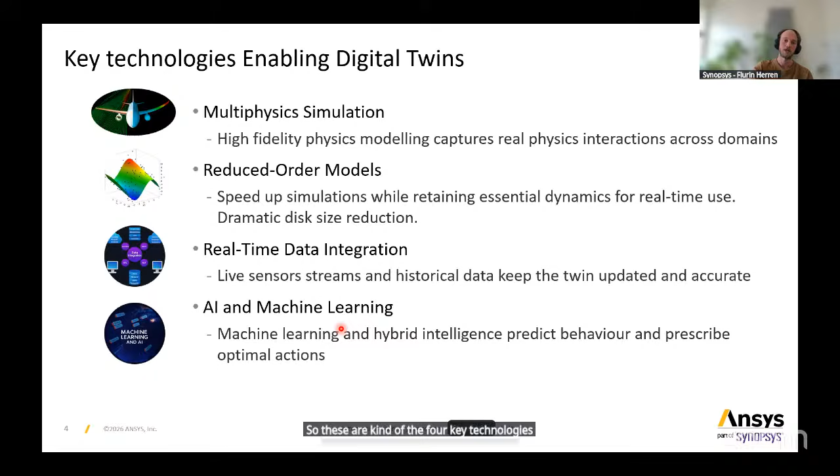So how does the ANSYS environment fit into this? I really like this view because it shows what ANSYS is all about. The foundation at the bottom is physics-based simulation, and we have all of these. Just above, we have the digital twins, which feed into all of these physics. So the multi-physics approach is covered to a great extent.

We can create reduced order models with our process and data management and optimization tools, such as OptiSlang, for example. We can use our AI tools to create prediction models. So we have basically all of the key technologies covered within the whole ANSYS suite.

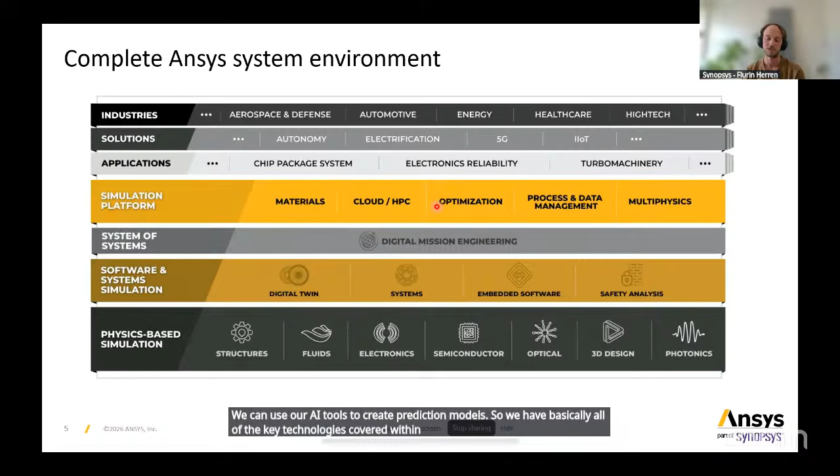And we can obviously create this as an exporter platform in an agnostic container as well. So this is kind of the full opportunity and the full possibility and capabilities that we have within the ANSYS suite. But I wanted to now build it up in two levels.

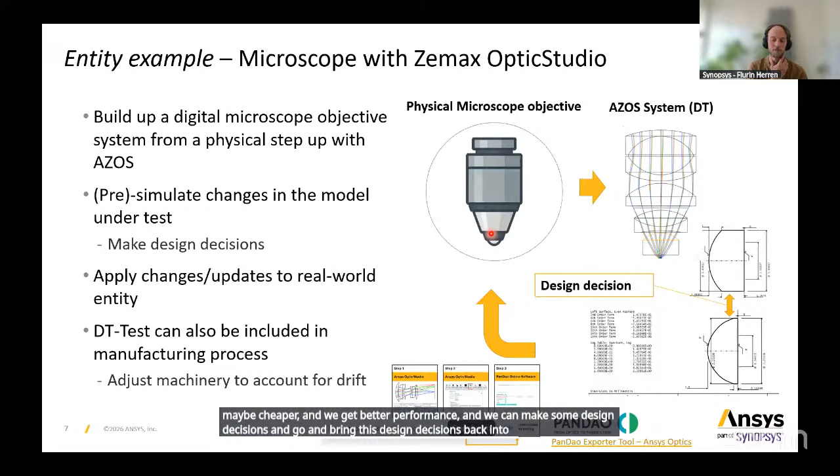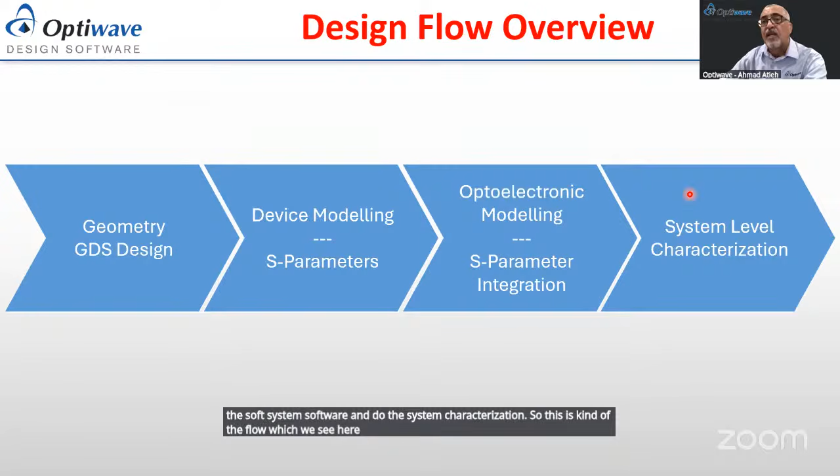These are the general components and GDS2 masks for the ring resonators, for example, or the modulators, as well as the multiplexer and demultiplexer side. This GDS mask has been used in the software, and then you can extract S-parameter matrices or netlists, and use them in system characterization.

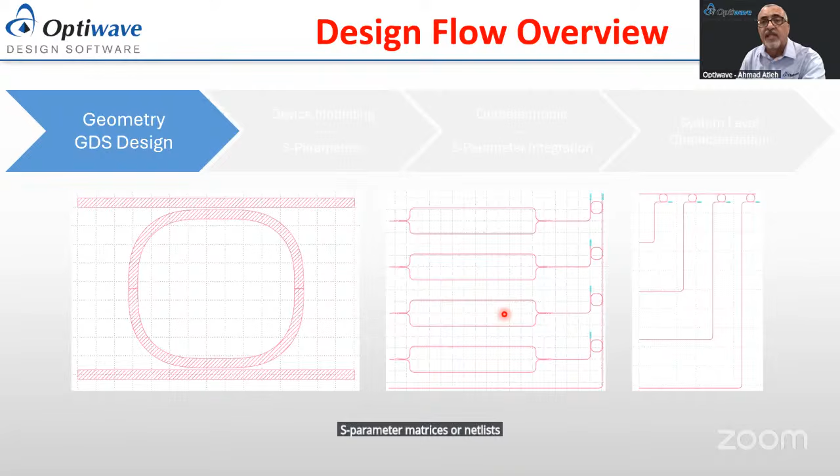So the first part here, beside the GDS mask, is the device level. At the device level, you can use different software packages in Optiwave, such as OptiOmega, which is dedicated for photonic integrated circuit designs, and then you can use FDTD to do the simulation.

You can also use the beam propagation method in OptiOmega. As you can see here, you design MMIs, ring resonators, waveguides, bends, and phase shifters. Anything you need to design, you can simulate within the software.

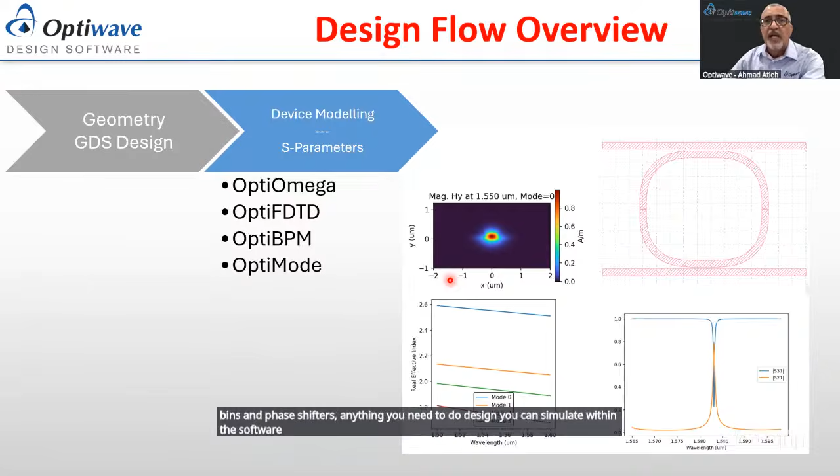This is the structure of the OptiSpice-like representation of the modulators, for example, how we use the design in OptiSpice. And then eventually, as you can see here, there's the modulator—two modulators right now—and then two rings.

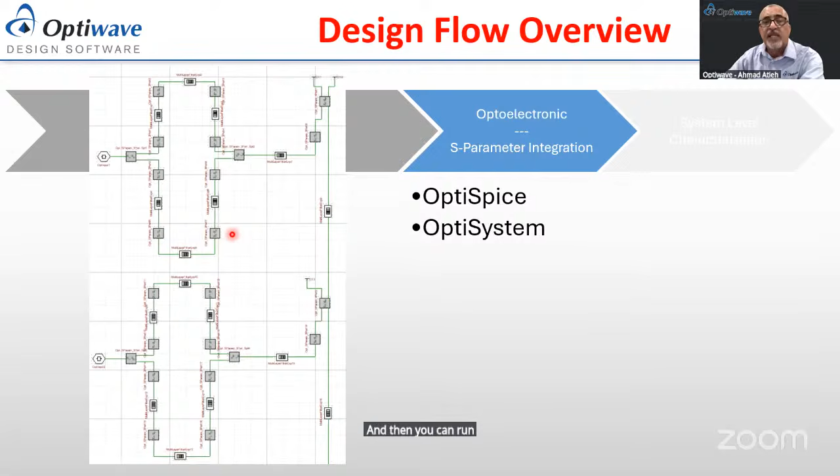Then you can run the simulation and create a netlist, and pass it to OptiSystem software, where you can go into the next phase, which is the system characterization.

Now, in the system characterization, OptiSystem software, you can integrate any type of modulation in the market externally to your PIC which you design. And then you can do system characterization, where you can look into, for example, BER analysis, constellation diagrams, and spectrum analysis.

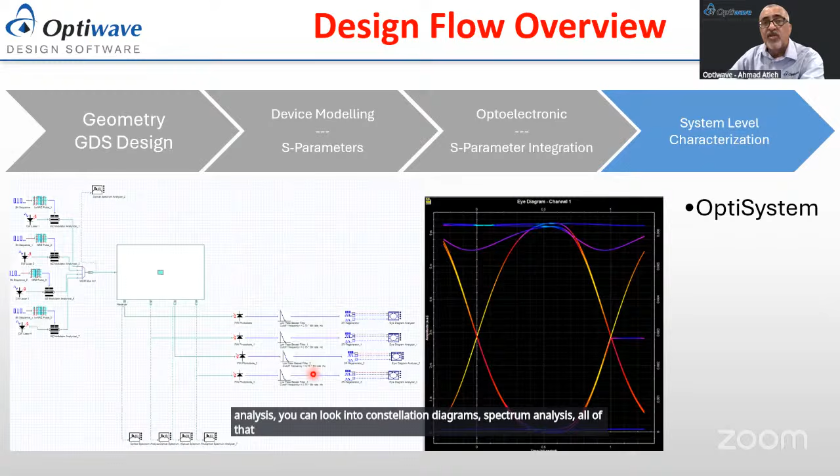In fact, OptiSystem software has over 630 components in the optical domain, electrical domain, binary, and M-ary, which you can use for designing your system, as well as to characterize or view the performance, represented in what we call visualizers, which are actually equipment in the field.

We also have an OptiSystem example library, which is a huge library mainly used for guiding users on how to use the components as well as build on it for the representation of the system. So what you can do is use these systems and plug in your PIC instead of the components used, for example, and do your analysis on it.

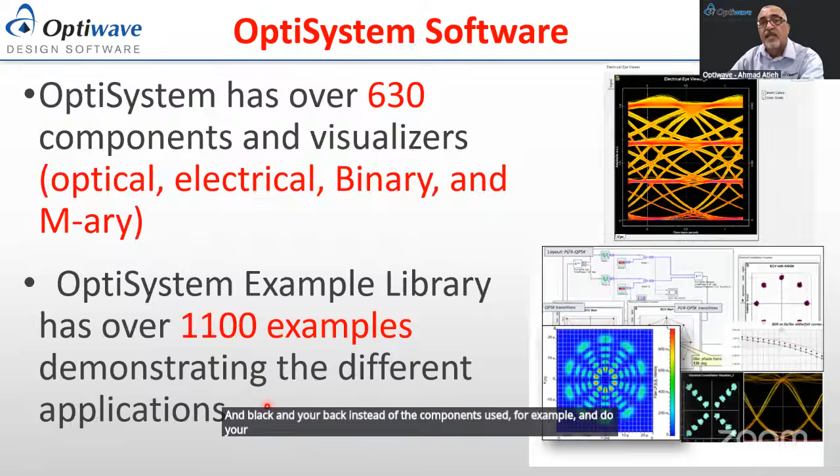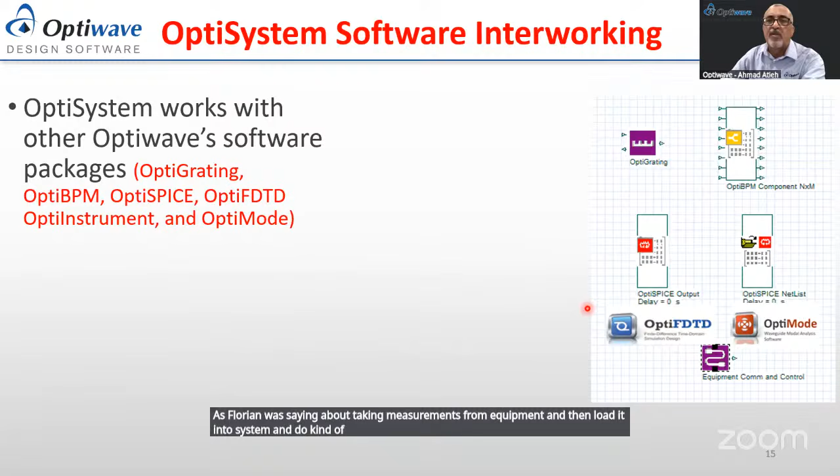Okay, and then the other part of it is external software integration, which can be done through the MATLAB component, C++, Python, as well as Scilab.

The other external software we're working with is Luceda, which is the IPKISS software. So you can design your photonic integrated circuit in their IPKISS software, and then do the simulation in their Caphe, get netlists, and then load it into this component, and we can use it for system characterization.

In fact, we have two videos on our YouTube channel which you can view on how to use ring resonators as well as cross-connect switches based on designs in IPKISS software.

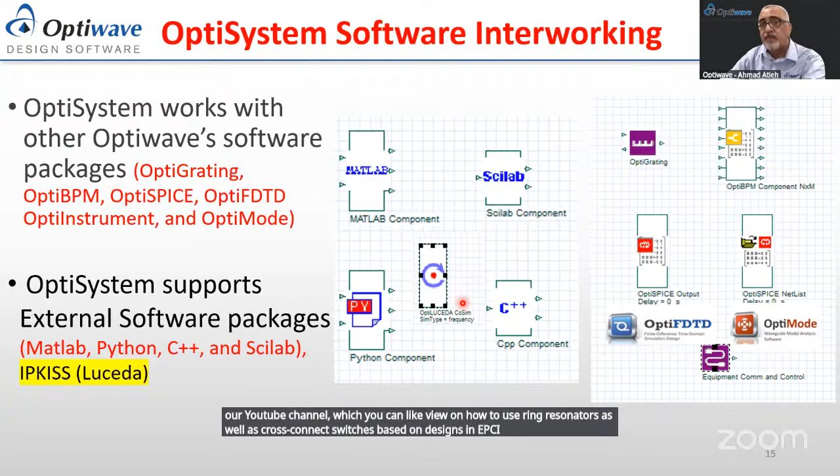This is now talking about the transmitter structure.

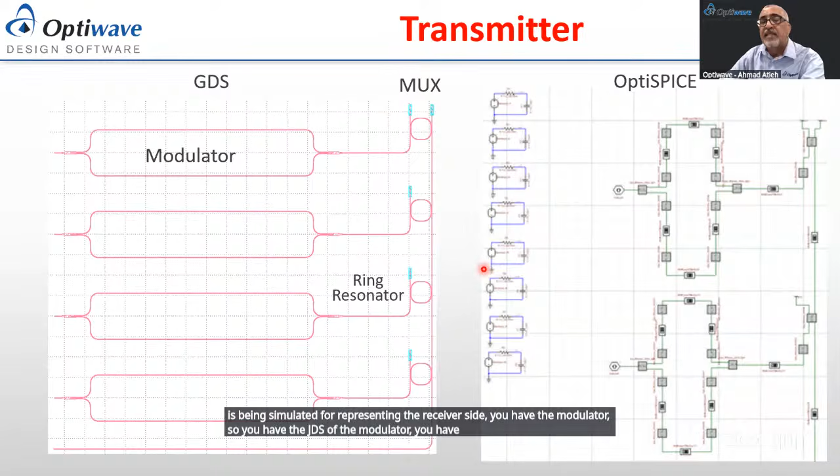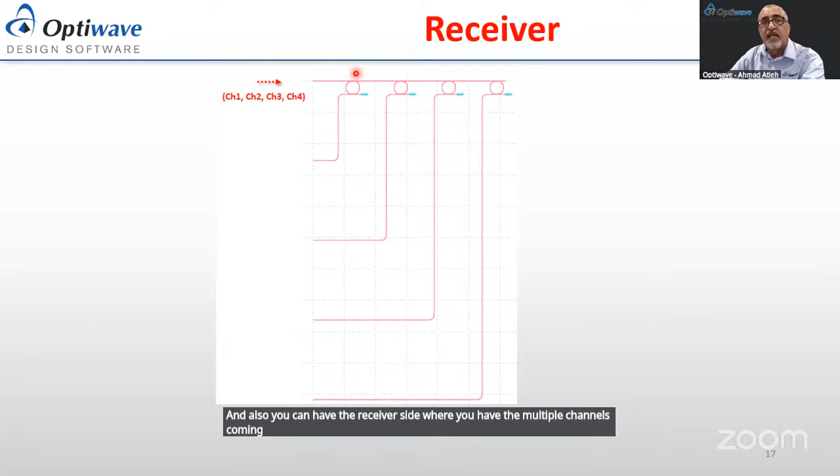For example, what is being simulated for representing the transmitter side, you have the modulator, the GDS of the modulator, and the MUX, and they can be represented in OptiSpice, as you can see here. Also you can have the receiver side where you have the multiple channels coming into the ring resonator, and you can demultiplex them to the desired channels.

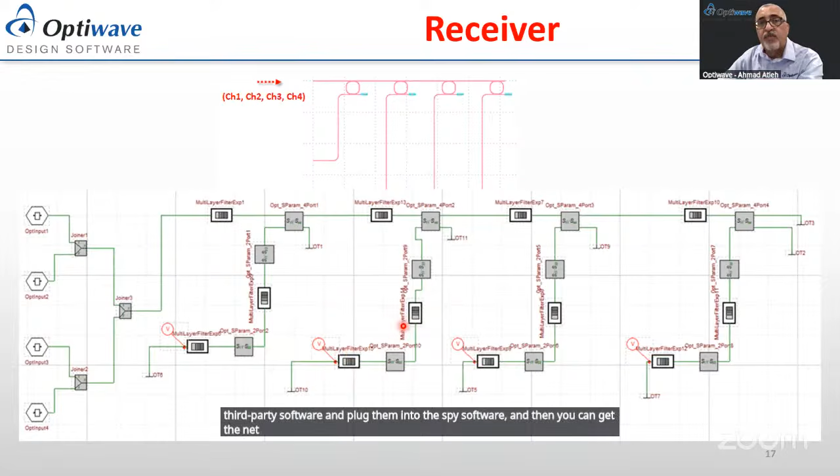As I mentioned, you can do the simulation on OptiSpice based on the S parameters you extract from OptiMode or from other third-party software and plug them into the SPICE software. Then you can get the netlist and use them in OptiSystem software. As you can see here, you can have these components from SPICE in the netlists, and eventually you can build.

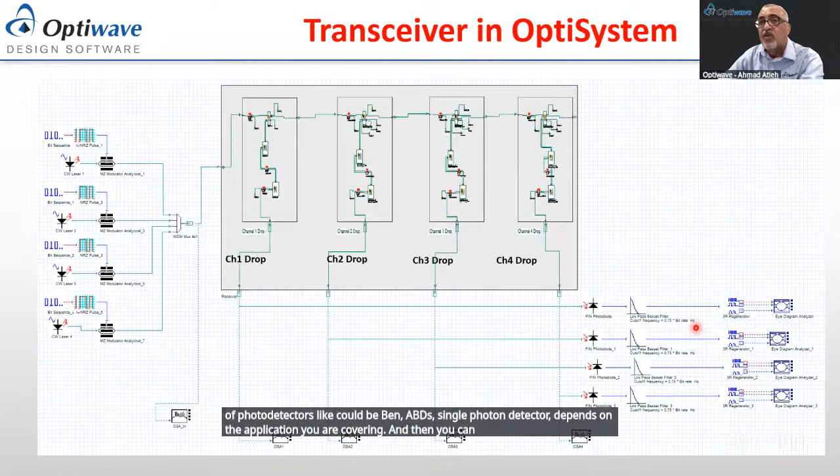Then you can do the monitoring using different instrumentation in OptiSystem software. So some of this analysis, like for example, you look at the spectrum analyzer and start to analyze the system in terms of isolation for the ring resonators, how is the isolation between channels and how is the insertion losses and so on. Also you can look at the eye diagrams and analyze the BER.

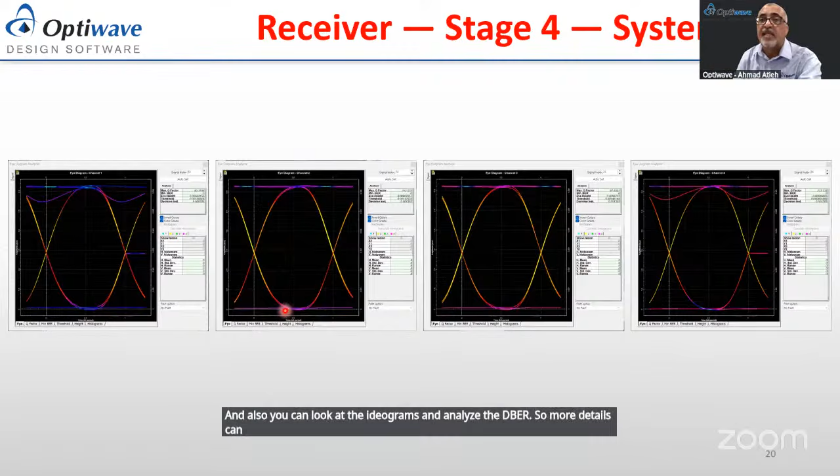More details can be seen if you are interested. Basically what we need to message here, hopefully from this presentation, is to get PIC designers to augment their system characterization to this flow. Also as part of our development here at Optiwave, we are adding into our software PDKs, which come with actual measured data for the devices and integrate them with the software to allow smoother presentation, like integration between the devices and the system characterization.

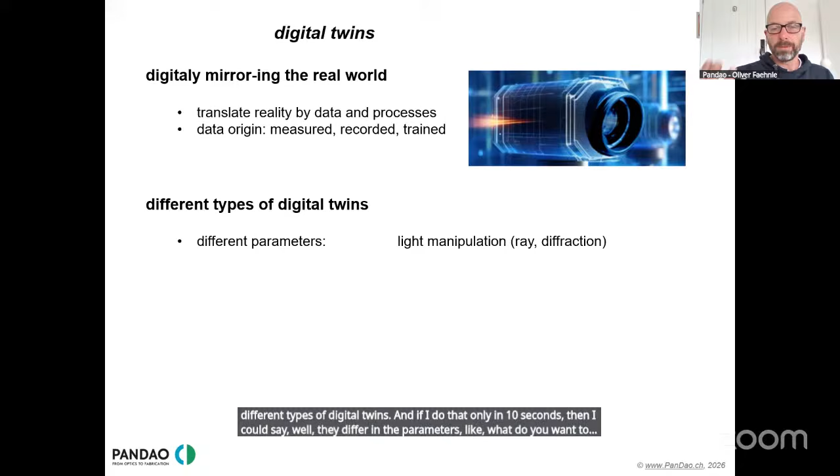If I do that in just 10 seconds: they differ in parameters—what do you want to use this twin for? Light manipulation, ray tracing, or diffraction optics effects, if we stick to optical design. There are many different parameters, and depending on the parameter, you need a different approach for your digital twin.

They also differ in application: is it for optics performance, for manufacturing quality—what we do—or for factory workflow without any physics, where you might use SAP? That defines your digital twin. They also differ in process analysis.

Are we really doing finite element analysis, checking material response to something, or computational fluid dynamics? Or are we just generating a data cloud and teaching that through AI?

Then the last one: the way we take data in. Are we training our AI with a data cloud? Do we use rules, do we use know-how? Do we even use communication information from a different digital twin, helping me, as a digital twin, become a little more complex?

So these are the different ways, and PanDao is monitoring the manufacturing quality, reading in optical designs of systems, and we do that at quite a complex level—the workflow level of fabrication chains.

We had to sharpen this very accurately to be able to generate and run that in industry. Inter-digital twins communication is a really hot topic because there is quality maintained or lost. In theory, it should even level up to a higher level, like a multi-agent system running in several AIs in one thing. So let me focus on optical design and producibility.

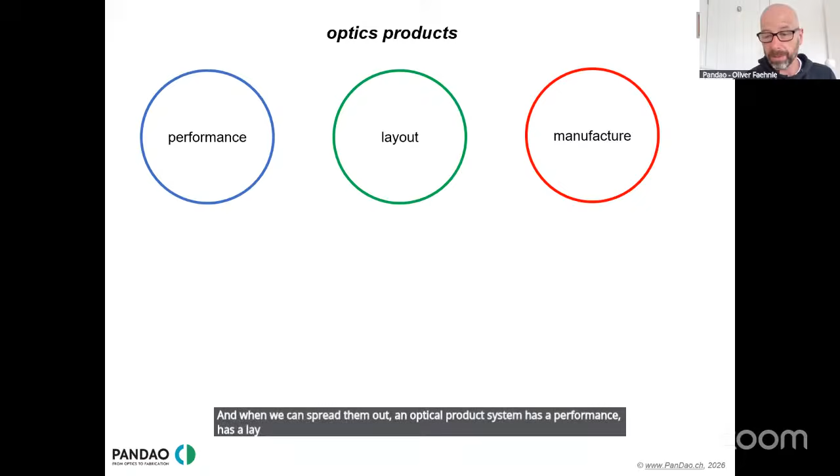If we have an optical product, those beautiful 3 circles you see here, we can spread them out. An optical product system has a performance, has a layout, and has to be manufactured. These are 3 different languages which we speak, like throughput, market price, and so on, and types of optics.

And types of technologies. If we have a look, we all know that there are beautiful digital twins existing, connecting the layout and the performance. The optical design softwares balance performance and system layout, whether that is a meta surface, a diffractive, or a refractive optical system—they all perform and have to do something like MTF.

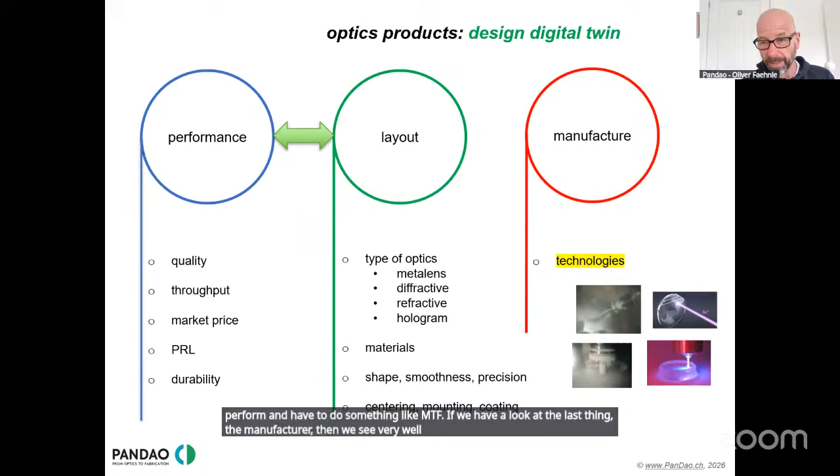If we have a look at the last thing, the manufacture, we see very well dedicated stuff like plasma, fluid jet, ion beam, and whatever. And it's a big mess. There are 360 different technologies, different physical effects, different solutions, different levels of TRL, of ripeness, industrial ripeness, and so on. So what can we do with that?

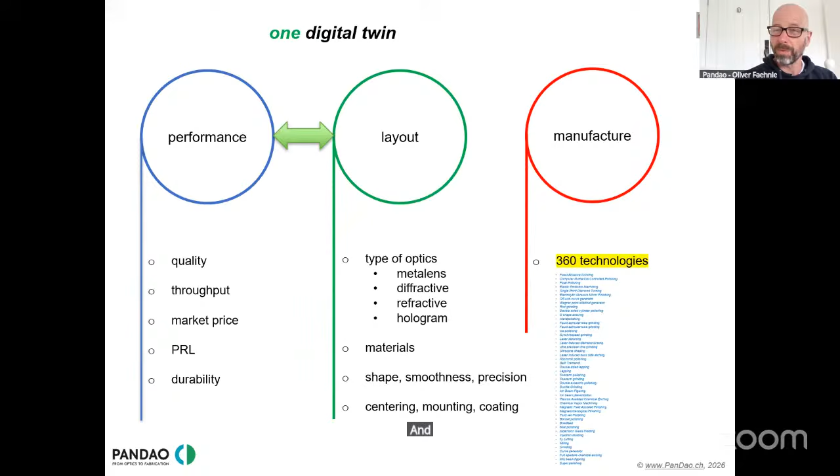If we went there inside and had a look—well, nobody needs a single digital twin for one technology. That's nice if you can model your polishing process for a professor in a university, but in industry we need the whole thing. So we went a level up and managed to model the whole fabrication chain. And well, how does that work?

If we are really doing that, you can level up, as Flurin showed in one of his slides—I will show at the end also a short slide to that. Once you have the layout optimized for performance, that does not mean that it's also optimized for manufacture. If you have here a digital twin connection, you can have a whole balancing from performance to manufacture through layout. That's what people are aiming on when they are using us—the digital twin that reaches from here to there.

So basically, like Star Wars, everybody wants to have the best design. For the best design, you need a producibility analysis, and then you need to optimize a fabrication chain. So if you manage to have your optical system described in, for example, ISO or MIL, then you feed it into a PanDao system.

There are 360 technologies digitalized, and they are digitalized in a way that they can communicate with each other on their level, and they are fighting with each other to be allowed in the best fabrication chain. The best chain swims out of the swarm of fish and is not getting eaten by this barracuda. And that's what we show at the output: the best fabrication chain.

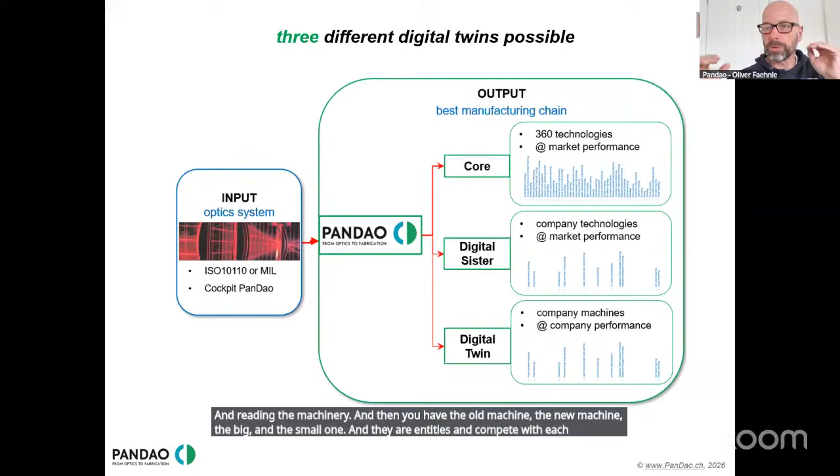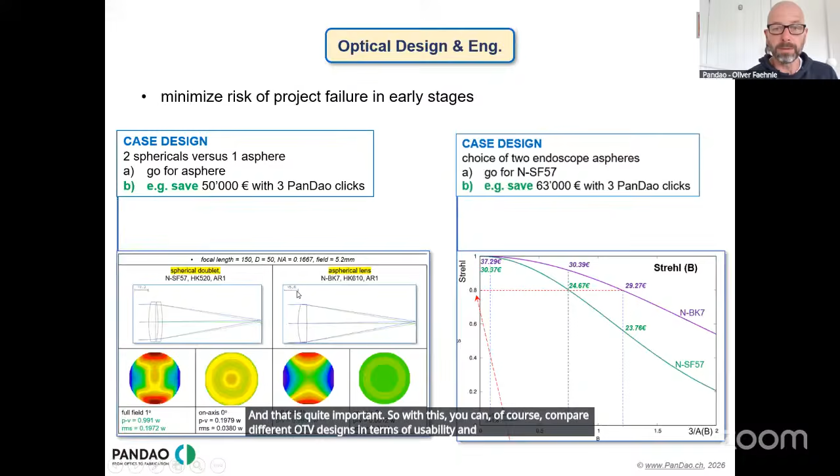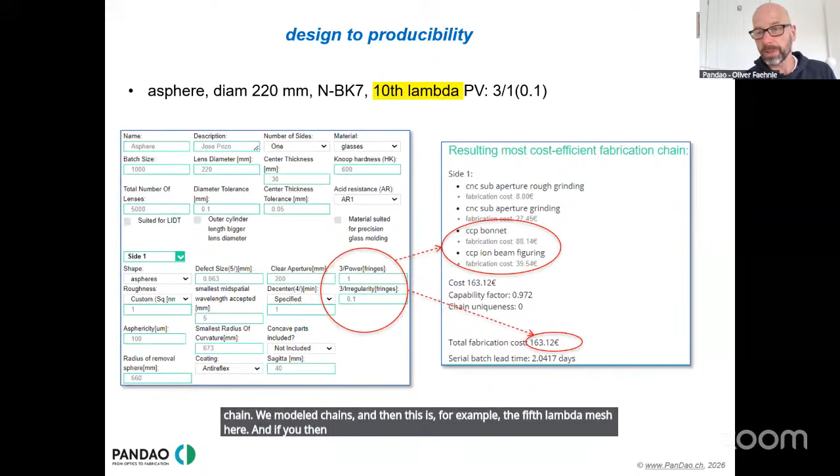So with this, you can compare different optical designs in terms of producibility and cost. You can read in optical elements, and then you see a technology chain. We modeled chains, and this is, for example, the 5th lambda asphere. If you then go to 10th lambda or whatever, you can change everything with one click, and the technology chain answer is different, from MRF to IBF, with some different costs.

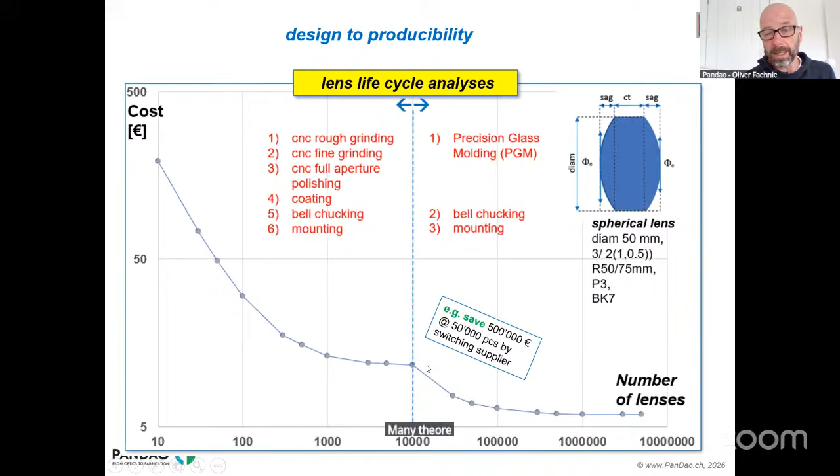With this, you can do a lifecycle analysis, like you want to know during prototyping what's the best chain and cost and risk for the serial fabrication, and where the technology switch is happening. If you know that, you can plan, and as optic designer Flurin, you can compare a glass system with a Zeonex plastic optics system. Then you see, on a logarithmic scale of cost and numbers, where they're quite close to each other, and you might want to jump for better quality and pay a little bit more for that.

So digital twins communicate not only between those technologies on a manufacturing level, but of course also with the digital twins from the optical design. Flurin had this beautiful slide in the beginning, and I want to go back to it, because you simulate and digitalize the performance and layout of your microscope objectives, and then you end up with two different qualities, and they impact with...

Sorry, Oliver, the sound is not good. That's why I'm stopping. Okay, can you hear me? Yeah, now it's better. Okay, maybe my finger was sliding a little bit. Okay, so...

You have two solutions which you consider, and they differ in performance but also differ in risk in manufacturing. So you can give these two variations to PanDao, for example, and then analyze it, and feed that back, communicate that back. This information can be used in the future for an even higher level optic design, where you have five versions possible during your Monte Carlo simulation, and then you weigh them with the manufacturing risk for the same performance, and you go in one direction that is optimized for the performance needed optically and the manufacturing risk we're prepared to take.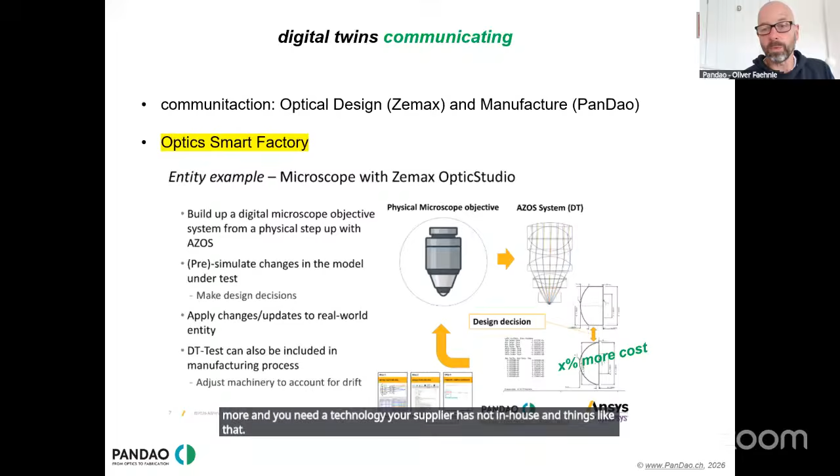We are located in Switzerland, in St. Gallen, and our company name is PanDao. If you're interested, we can show you some of your optics and what we can do with that. We do digital twins of optical workshops of companies, and then with one click you have your whole optical workshop performance, and get the best fabrication chain through your machinery, and can benchmark that with what's available out in the market. These are some customers who are using us.

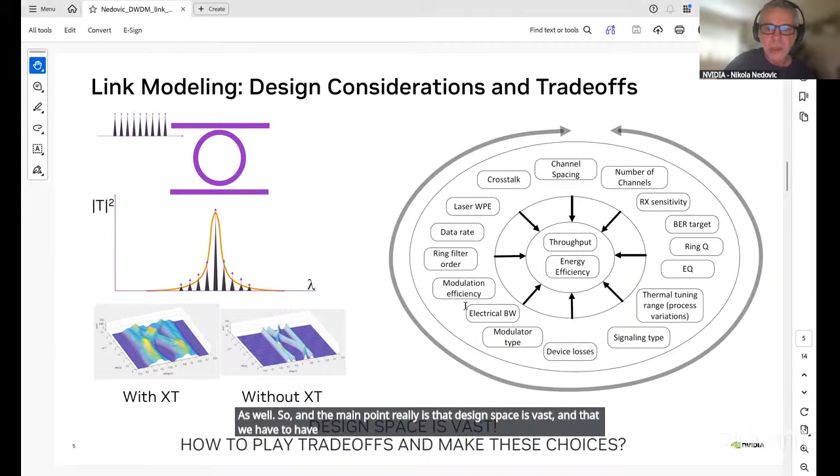So the main point really is that the design space is vast, and we have to have a tool to make these trade-offs and make these choices.

This is a high-level picture of how our internal statistical link tool works. By no means is it the only way to do it, but this is how we handle it.

We first capture the behavior of individual components - I'm going to talk a bit more about rings later - but in general, we capture those components' behavior in the time domain, whether they be optical or electrical components, whether measured, simulated, high level or low level, it doesn't matter. As long as we have a description of its behavior in the time domain, we can then proceed to building a link-level step response matrix.

Basically this will give us a response at any output of the system to any input of the system. It's a big kind of MIMO system that captures all intended behavior, all intended input-to-output transfer functions, as well as all the possible crosstalks and side-channel interactions in the system.

When we have that, we combine it with the data pattern probability and the noise to create statistical eye diagrams. From these statistical eye diagrams, we can get things like eye openings, and in combination with the power model, energy efficiency, and any sensitivities of these metrics to the input parameters we can wiggle, we can optimize.

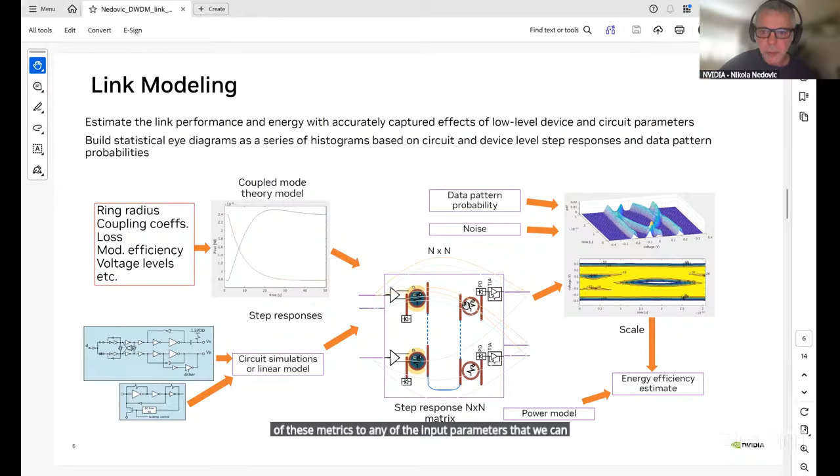Here I show some details on how we estimate the device-level models, for example for micro rings. Essentially what we do is our own encapsulated inline simulation of the ring - basically what SPICE would do, but stripped of anything unessential, to minimize computation time and allow a quick but accurate description of the behavior at a time-domain level.

We do the computation in the complex domain to keep track of the light phase information, which is a peculiarity of light here, or actually anything oscillating. We specifically separate low-to-high and high-to-low responses to capture nonlinearity, because these devices are known to be nonlinear at this level.

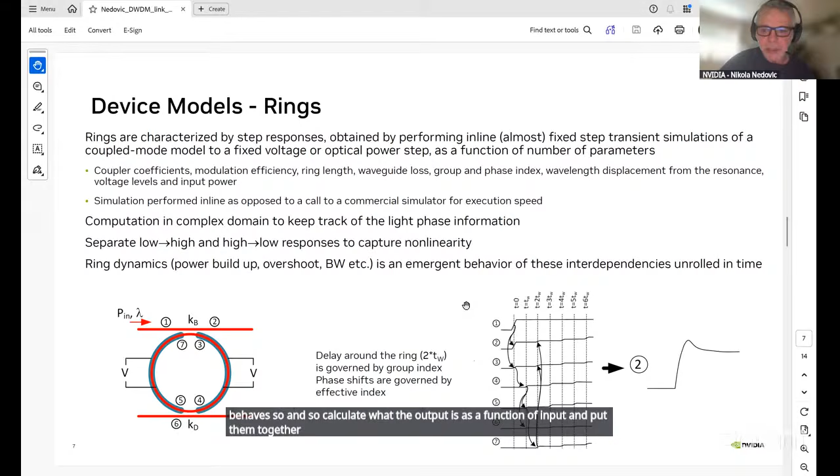I want to point out that really anything complex, things like power buildup, overshoots, optical bandwidth, and so on, is an emergent behavior. We don't specifically model any of that. We just say every component in this device behaves so and so, calculate what the output is as a function of input, and put them together.

And as a result, we get these overshoots and bandwidths and so on. So next, we use these responses to build a statistical eye diagram, and we do this by convolving impulse responses of all these components that we calculated from every input to every output. We do that by having some way of representing how our system looks like.

So what comes first, what comes second, because this is sort of a one-dimensional system, and we use that fact. So we have some sort of computationally non-intensive way of building these step responses. For example, from the second input to the third output, we traverse basically this one-dimensional graph.

And we do the convolution of all these components, including electrical device first, then optical device, a ring in this case, going from electrical input to optical output, and then hop one by one, accounting for all the non-idealities and losses, again from optical input to optical output and so on, until we get to the output of the system that we're interested in.

And we add the effect of random noise by convolving the noiseless histogram, which we build by doing this, with the noise PDF with the appropriate transfer function, which is also what we calculate on the side. This depends on the point of the noise occurrence.

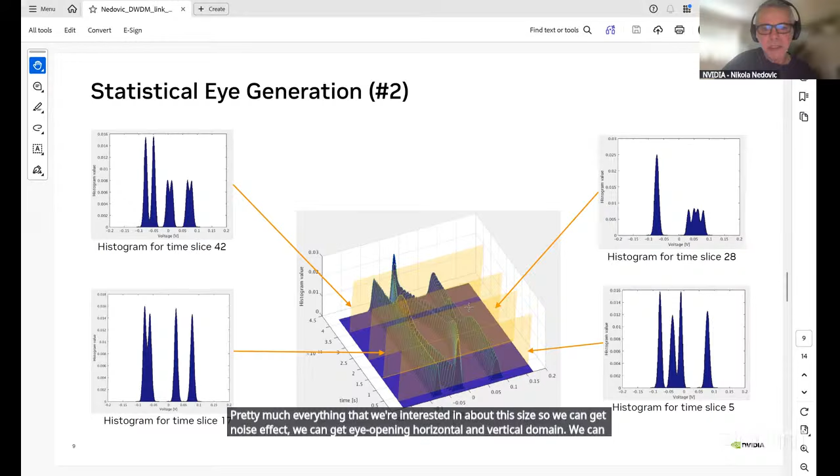So we can get noise effect, we can get eye opening, horizontal and vertical. We can get energy efficiency, and we can get the sensitivity of all these metrics to all our inputs. So the next few slides show some examples of what we can get with this tool.

I'm not going to spend too much time, but this is just an illustration. For example, if we have a link that is already architected, meaning we know how many input channels, what the data rate is, and so on, we can use this tool to get the quality factor of the transmitter and receiver side. We can do this by some sort of complex optimization, or here I just show some really brute force 2D sweep, and we simply pick the best of the metrics that we're interested in.

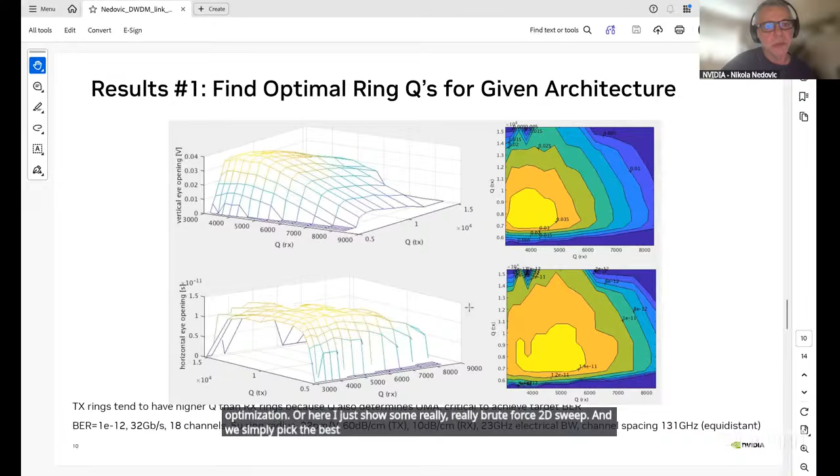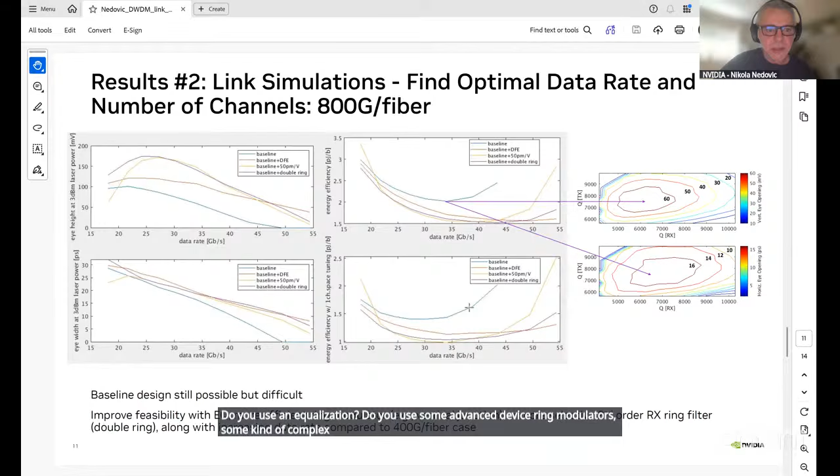Another example is a link simulation for, in this case, an 800 gigabit per second fiber, with many assumptions on what kind of devices we have, what kind of electrical circuitry we have, what bandwidth, and so on. You can see that you can get a very quick and simple estimation of the best, let's say in this case, energy efficiency as a function of data rate, and as a function of whether you use equalization, advanced ring modulators, or some kind of complex optical filter at the receiver, and so on.

You really want to do whatever you can to optimize or increase the amplitude at the receiver, which is then what the noise acts on. PAM4 simply kills that metric by a lot, by 9 dB or actually more in practice. The only reason you'd want to use PAM4 is if for some other reason you're forced to work at really high data rates where other things like electrical circuits blow up, and you have a very difficult time, spending a lot of resources, energy, area, and so on. This is where PAM4 can actually buy you something.

But if you have the freedom to choose, use the WDM system and choose whatever data rates and number of channels - this, according to this study, is not competitive compared to the NRZ.

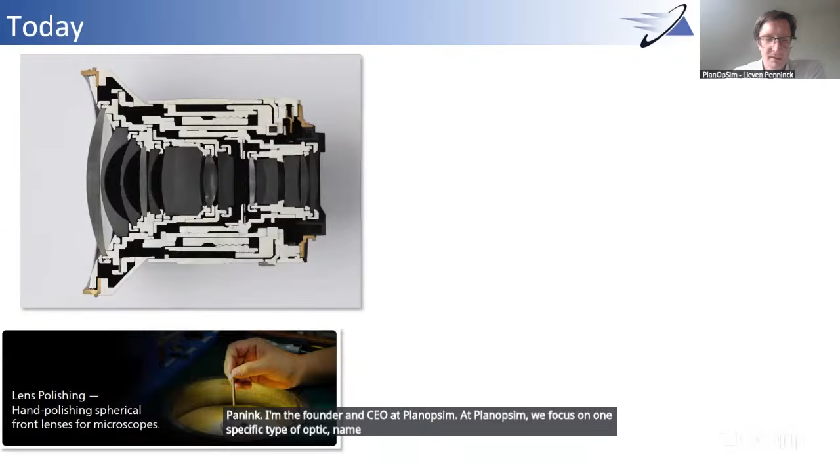So indeed, I'm Lieven Penninck, founder and CEO at PlanOpSim. At PlanOpSim, we focus on one specific type of optic, namely meta lenses and meta surfaces. From your different educations, I'm sure you've all been introduced to traditional optical systems that consist of many lenses which have been optimized to work together to deliver a certain MTF or beam shaping performance. All of this is very big and bulky and not really well suited, for instance, for miniaturization and integration on a very large scale.

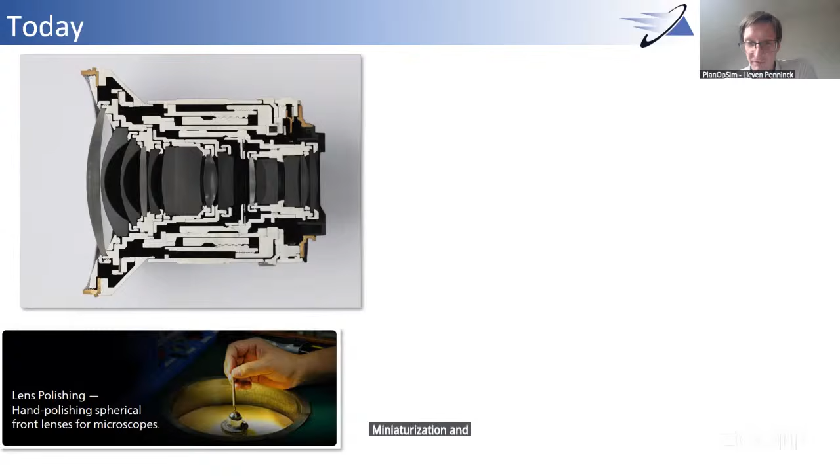And to improve on that, a new technology was put forward called meta lenses and meta surfaces. These use nanostructures to locally manipulate the light and shape it in any way that we want. What that allows is that we can create components that are very difficult to create with conventional optics, making the optics smaller, arrayed in large areas, for instance, making miniaturized or simplified applications. And all of this is manufactured and compatible with technologies we all know from the semiconductor industry, namely etching and lithography. Everything is in dielectric materials - there's no organics involved, or they don't have to be.

And this might sound a bit futuristic, and I have to say it was futuristic 10 years ago. Nowadays, these components are found in some high-volume consumer electronic products, for instance as you see in this teardown that was done by Yole Development. The meta surface there is used to replace several conventional optics to make a complicated functionality in a single piece.

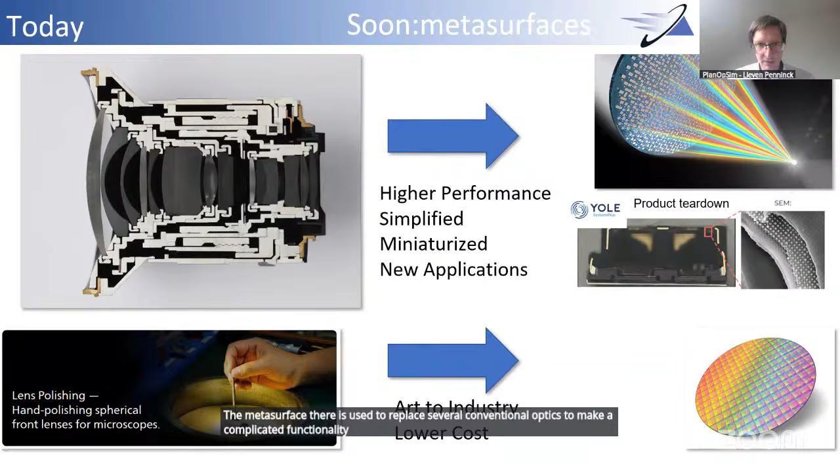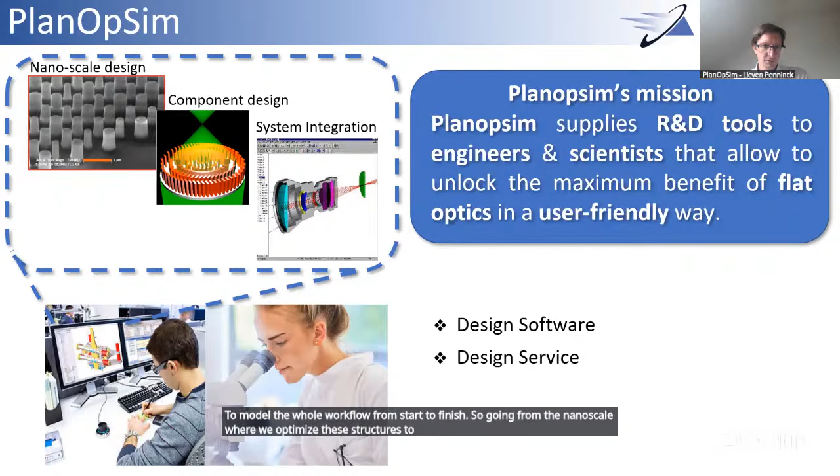Now, what is PlanOpSim? PlanOpSim's role in all of this is to take the optical designer's role, which usually was based on geometrical optics, and bring them into this new world of wave-based and meta-surface optics. For that, we provide simulation and design tools to model the whole workflow from start to finish - going from the nanoscale, where we optimize these structures, to organizing them in components, to then integrating these components into systems. And the workflow looks a little bit like this, and I'll talk a little bit about why we need a multi-scale model to design such meta-optics-based systems.

The nanostructures are tiny, smaller than a wavelength, so we need to model Maxwell's equations in full to accurately model them. Anyone who has seen introductions of FDTD knows these simulations take a lot of time. They are not feasible for the millions of structures within a meta lens. So for that, we go to a next scale of simulation where we have a phenomenological model based on a database or a pre-trained or even analytically derived function of what our meta atoms are capable of, sometimes also in concert.

Then we bring them to a component level where there are millions to billions of these structures, and we calculate using wave optics what their performance is. That's still just a single component. If we want to think about systems, we have to couple that all the way back into the system, which is so large that in a lot of cases it can even be communication between satellites. It's that large that really only ray tracing will work.

Our PlanOpSim software platform allows this end-to-end simulation of meta surfaces from the nanostructure scale to the large scale. It is completely automated and can be addressed via an API, so it's very easy to integrate, for instance, with other running or updatable systems that were introduced by the previous speakers. And you can step in and out of this workflow at any point.

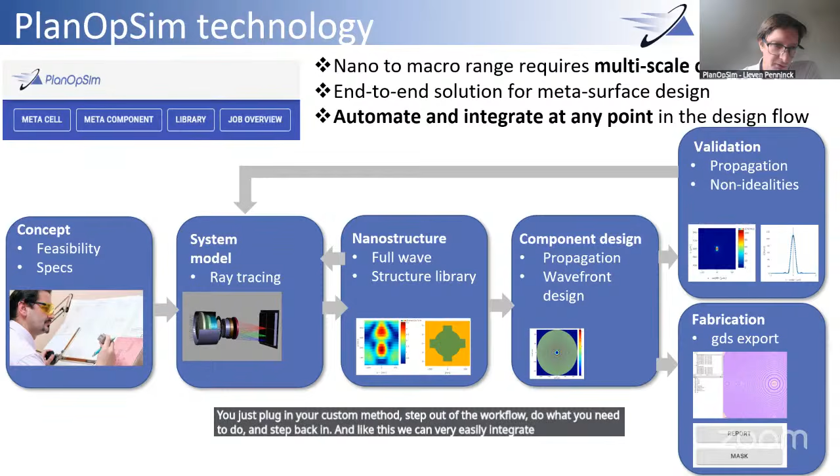So if you have some proprietary algorithm that you would like to use instead, that's no problem. You just plug in your custom method, step out of the workflow, do what you need to do, and step back in. Like this, we can very easily integrate a detailed optical multi-scale model with all kinds of other optical engineering. Diving a little bit into the different models that we use and why we use them.

On the nanostructure scale, we use rigorous coupled wave analysis to solve Maxwell's equations. There are many other ways to solve Maxwell's equations. For this particular type of structure, we found that RCWA outperforms most other methods in terms of speed, but it gives the same results because they are solving the same physical equations. Of course, this is not a general property - it just happens to be the case for this type of pillar and other small nanostructure types of calculations. It might be entirely different for a PIC, for instance.

When we have these libraries of structures, we can then start integrating them into components and make, for instance, a lens. Here I recreated a simple, famous design example from the Capasso group, where we use these rotating pillars to control the phase and create a polarization conversion, organizing them into a concentric phase front generating a lens. So we can easily create this in a short time using our cloud multi-scale platform.

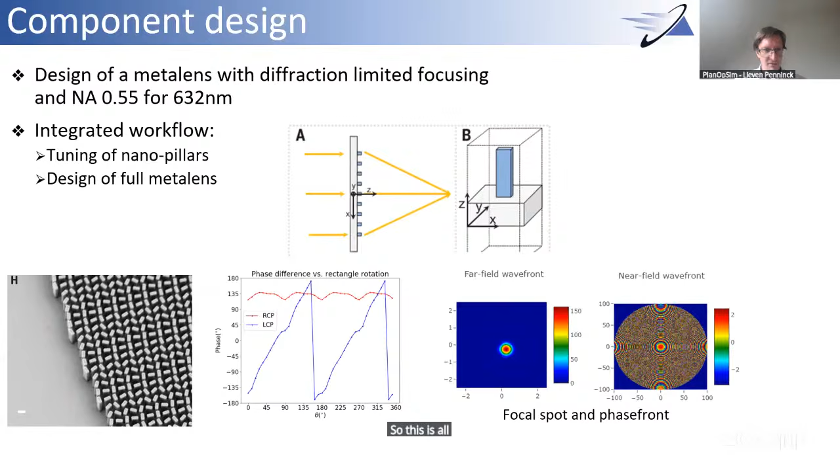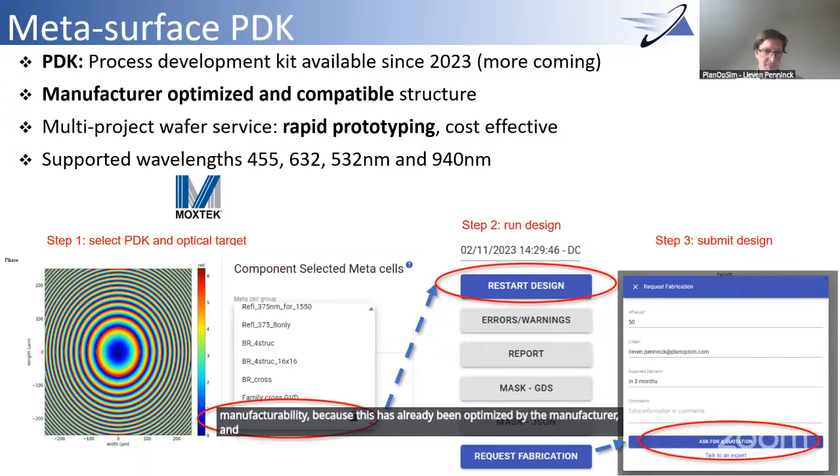This world of nanostructures is very new for a lot of optical designers. So we borrowed the concept from the electronics world and the PIC world, known as PDKs. Designers can now in software select PDKs which have been pre-optimized by manufacturers so that they can directly use these pillars in their designs without having to worry about the manufacturability.

For this, we have phenomenological models that come directly out of our ray tracing link, which you can then plug into different ray tracers like TracePro. And I'm excited to say that very soon there will be other ray tracers as well that we will announce. We also have a direct SDK so that you can connect this to your own in-house ray tracers or other models, finally allowing you to use the metasurface in a system.

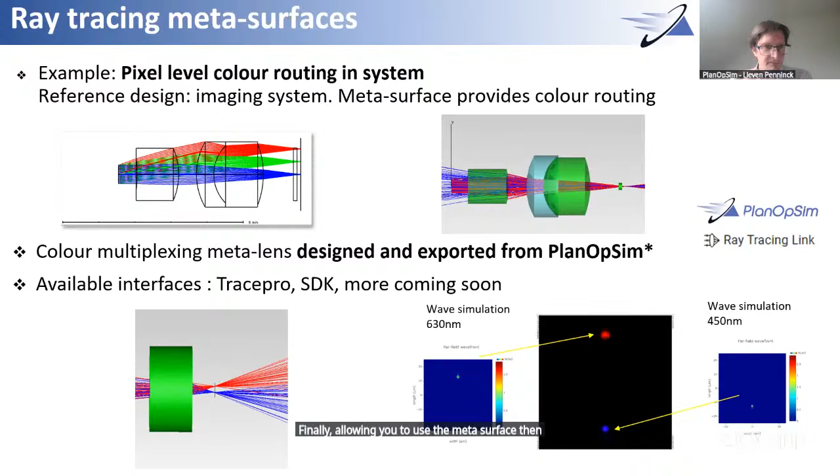If we then go one step further and think about design for manufacturing, we know that as we manufacture millions of these pieces, for sure they are not all the same. We will have typical manufacturing effects like sidewall angle, shapes deforming, local proximity corrections that need to be done in order to control the shape. What is often nebulous is what is the effect of that on the optical system performance.

By connecting the whole chain from the pillar shape to the metasurface and the optical system design, plugging in those exact changes, we can model what is the effect on the optical performance — not just on some abstract phase function, but actually on the performance of the system.

For instance, decreasing the pillar size leads to a stronger increase in the stray light than increasing it. This gives you crucial information in manufacturing — that probably you want to err on the side of caution, a little bit too large, so that when your natural deviations occur, you have a better overall yield of your system, because you are trying to align hundreds or maybe more of these lenses, for instance in some quantum computing applications that's very much needed.

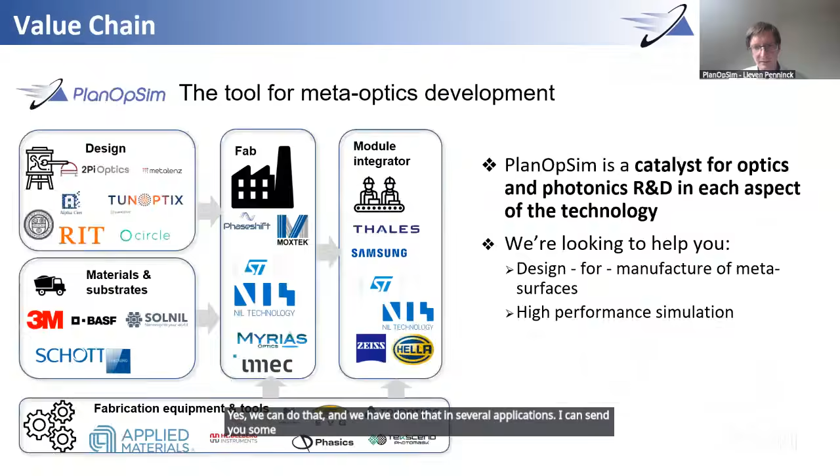Yes, we can do that, and we have done that in several applications. I can send you some details of that. So in the case here, for instance, it was differences in the diameter of the pillar. But essentially what you need is a model for each deformation and what its effect is on the optical response.

Locally in your metasurface, you have millions of these pillars, so you start locally replacing them, and you see then what's the effect on your wavefront, and ultimately cascade that forward into your system performance. But you need these multiple scales of simulation to be fast enough so you can run through these different cases. If you do a Monte Carlo, for instance, you end up simulating hundreds of thousands of different lenses. So if you try to brute force your way through that, it won't work.

Thank you so much. Thank you, Andreas, and thank you again, Lieven, for your nice presentation.

Our customers are, of course, telecom operators. We are working with Orange, the famous French company. We also work with equipment vendors because they can integrate and insert their own product into a typical network and see how it works with other vendors, and they can find some advantage or some change for future R&D development.

We are working with energy providers, who have a lot of fiber network systems, academic institutions to work on advanced systems and network architectures, transport companies for which the transmission networks are really critical and strategic, semiconductor and PICs, and defense and government. We work with some defense organizations to see how we can provide and maintain the networks at the right performance.

The second one is just free space optical communication between two systems. We have the measurement results, and we made some simulation, and we find equivalent results. It means that the owner of this communication link can anticipate, depending on the weather condition and the load of the network.

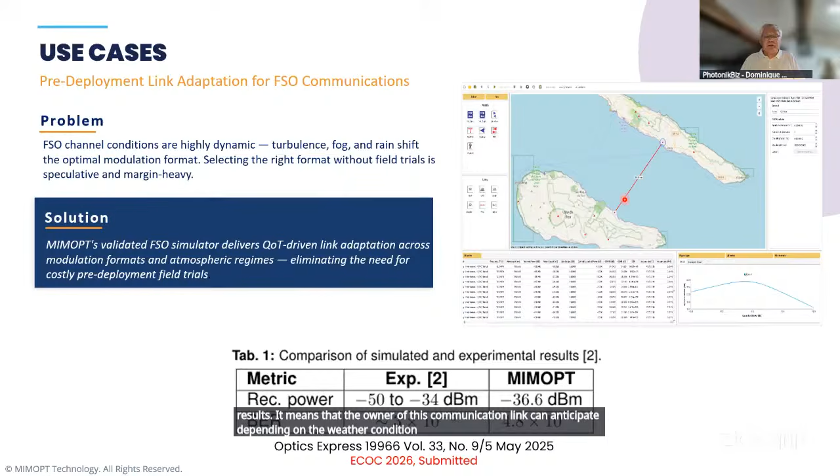It was very short, so we offer optical network digital twins, and we are looking for challenging projects, optical fiber and free space optical communication. Thank you for your attention. At the last slide, you have the contact and the email. So if you have questions, it was short because it is the last one.